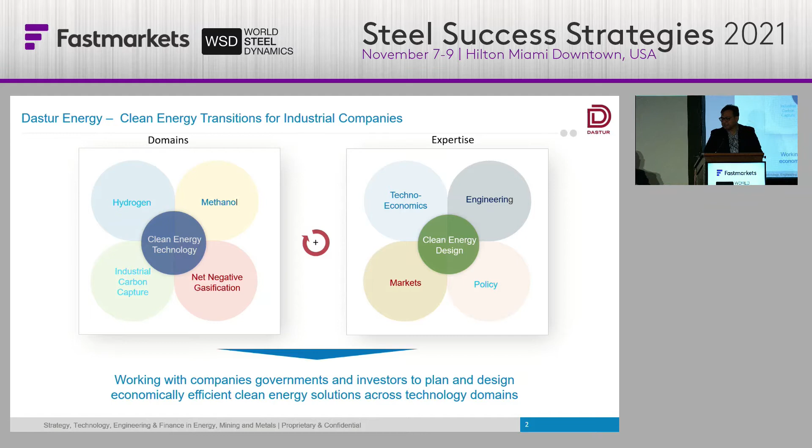So some of the recent projects that are in the public domain that we can discuss a little bit about to give a flavor of the kind of work we do. We're currently engaged in a very interesting and very impactful, we hope, project to capture a couple of million tons of carbon dioxide at Burns Harbor, one of the very storied plants, in Burns Harbor, Indiana, which is a 5 million ton steel plant. Many of you are familiar with it. It is the first carbon capture project, by the way, in the U.S. at a blast furnace at this scale.

We just finished up, or are very close to finishing up, the first carbon capture project at a refinery in India, which is a U.S. Trade Development Agency project. Just finished up another project a couple of months ago on petcoke gasification in India, also for a large refiner.

And we also did a large-scale carbon capture and clean energy from petcoke project for Abu Dhabi National Oil Company, which is the 7th largest oil producer in the world, capturing about 5 million tons of carbon dioxide for use in enhanced oil recovery. And we finished that up a couple years ago, just as COVID was getting started. And so these are all feasibility studies or pre-FEED design works that we've done.

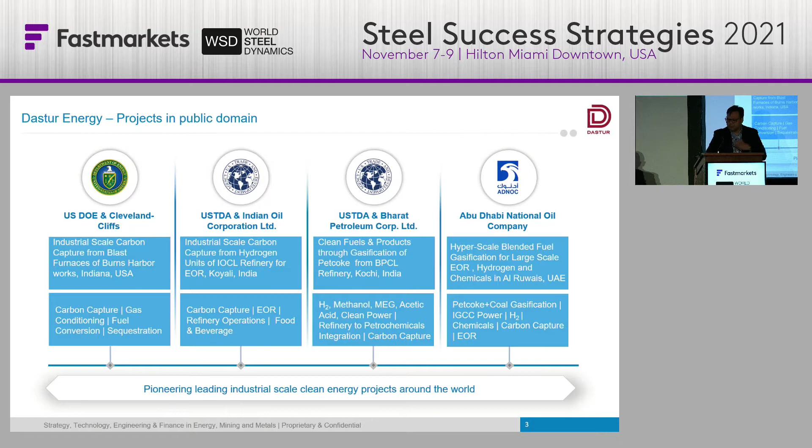And so we get involved in the initial conceptualization, the design, the FEED, and we are really not tied that way to any technology provider per se. We work with multiple technology providers to do these studies on behalf of clients.

So specifically, I won't go over this too much, but as you know, steelmaking generates a very substantial part of the industrial emissions. Industrial emissions make up a quarter of the total emissions in the world. And steel makes up about a quarter of that. 7% is the average number across various studies that we've done.

And specifically when we talk about Europe, the cap and trade, the ETS scheme that is in place and that has been increased recently, results in approximately, we think across the steel makers we work with, about a 30% reduction by 2030 in terms of their carbon footprint for integrated steel makers. So that is a large motivator, basically an accelerator, to make decisions and choose the right path in terms of moving forward.

A part of this battle really is that there are several things complicating the situation here. One is the change in regulatory landscape, both in the US as well as in Europe, and the emerging landscape in places like India and China.

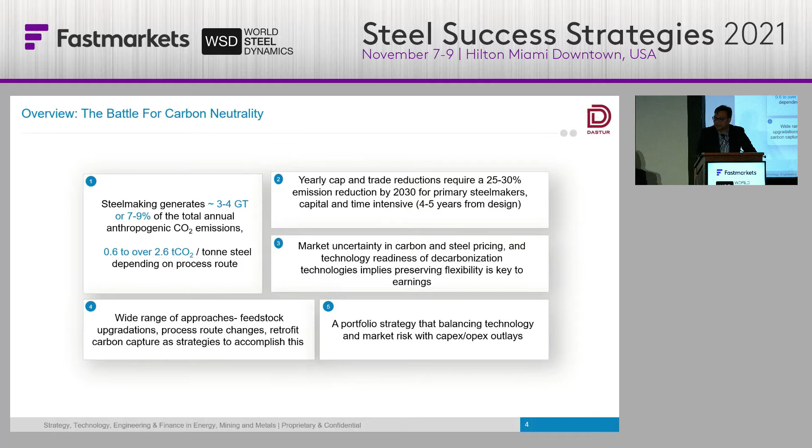In Europe, the ETS cap and trade numbers have also been changing, and there's been an increased push to increase the level of carbon capture, and I think the targets for 2030 have been going up quite a bit recently. So that's driving a lot of the activity.

We talked about the 3 process routes. I won't go into detail, and these are kind of the overall numbers for capture. When you add up the different contributors, obviously the lowest is the EAF route. Then there's a natural gas DR route, which results in 1.2 to 1.4 tons of carbon dioxide per ton of steel produced. And then the BF-BOF route, and that really includes all the emitters possible, which includes sinter plants, coke oven batteries, and the blast furnace, which of course is the largest emitter in the integrated plant picture.

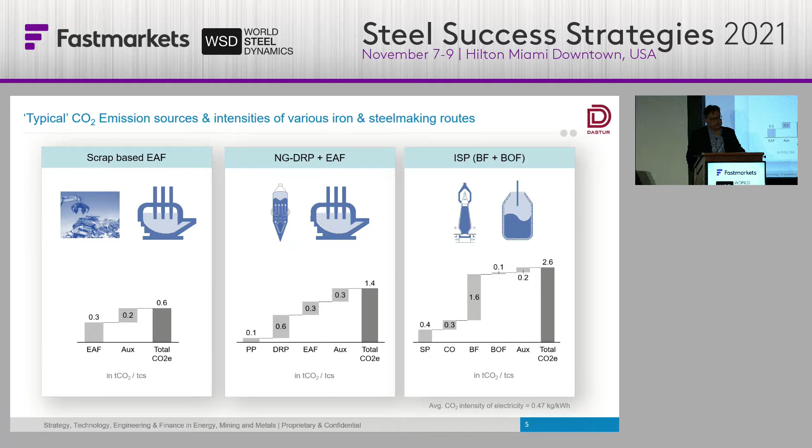Now the numbers in the U.S. are a lot better, and the numbers at plants that we've been talking about, like SSAB or IJmuiden, who we'll talk about in Europe, are much better. Some of these are some of the best plants in the world, and many of those plants have significantly lower carbon footprints than the numbers you see here. These are global averages. The World Steel Association average across all the plants is about 1.8 or 1.9 tons of carbon dioxide per ton of steel. So that's across all the different kinds. So this is the range of numbers.

So when we look at the different paths taken by the different players, I'll talk about some of the recent developments. ArcelorMittal, as you know, recently moved away from a blast furnace carbon capture project, and they've moved to switching to an EAF, and they have also been going for a while at their Ghent project, a carbon to ethanol project, which is very interesting. They were actually going to do about 3 million tons of carbon capture and store it under the North Sea, and they've moved away from that and into this.

We're involved in the project at Cliffs that I mentioned, a DOE study with Cliffs to design a carbon capture project for the Burns Harbor blast furnace. The one project on the DR/EAF route that is actually implementing carbon capture already is the Emirates Steel project, which captures about 0.8 million tons of carbon dioxide per year and has been in operation since 2016. We're also involved in a DR project in India at Jindal Steel and Power, which has gasification and is doing carbon capture. And then you heard directly from SSAB.

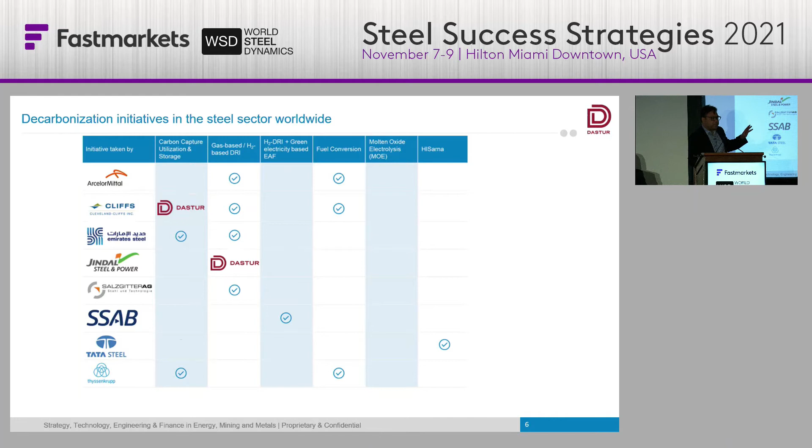There's Tata Steel IJmuiden, which recently committed to a hydrogen route for carbon capture on their blast furnaces at IJmuiden. So there's a range of different approaches taken by the different players. I'll talk a little bit about the Burns Harbor project because that's something we're very close to, and we see a lot of opportunity for it to be replicated at other blast furnaces.

Burns Harbor is a 5 million ton primary steelmaking operation. It's a very large-scale operation. We plan to reduce the carbon emissions from the blast furnace by about 70%, capturing about 2.8 million tons. And we plan to do it in a process that keeps the cost neutral to the 45Q tax credit regime in the U.S., which gives you about $50 of credit.

The project uses proven carbon capture and gas processing technologies for both carbon dioxide capture and hydrogen separation. The hydrogen will currently be used for clean power. It'll just go into the powerhouse for now, replacing natural gas. But over time, as the demand for hydrogen and the types of uses of hydrogen in the steel plant increase, we expect it could be used for other things, such as maybe someday hydrogen-based blast furnaces, direct injection into the blast furnace, for example.

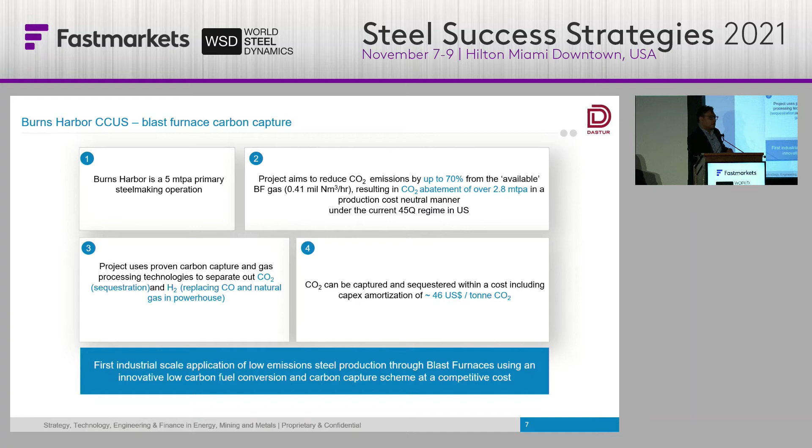Our current cost of the project, based on the technology and the numbers that we have, is about $46 per ton. That includes CapEx amortization, and that also includes about a $10 cost approximation for transport and storage offsite for that carbon dioxide.

So in the different directions that folks have taken, and we are also engaged with several steelmakers in conversations, there are several challenges that were talked about earlier today. Specifically, if we're moving to gas-based DRI or hydrogen, we're talking of large projects with at least 1 million tons of production, and in the DRI route there's about 1 million tons of carbon dioxide coming out for 1 million tons of production.

So there's a need to implement CCUS or find a transition to hydrogen, and as the panel just before me talked about, finding 1 million tons of hydrogen at an acceptable cost point is extremely difficult, even in the next 2-3 years. It's really difficult.

And secondly, for gas-based DRI, right now the cost of gas is very high everywhere. But even if you assume a longer-term natural gas price of about $3 per MMBTU in the US, the corresponding price in Europe would be about $7-8, even with the pipe gas coming in from Russia and Ukraine. So the cost of the gas DRI has to be taken into account in figuring out the economics for that route versus carbon capture on an existing primary steelmaking route.

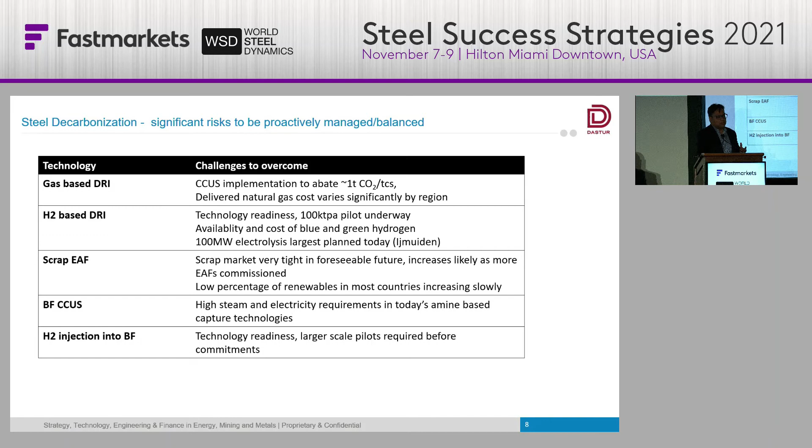And again, hydrogen injection into the BF: there's a lot of interest from steelmakers we deal with on that, but that technology also is not ready to be bet on by somebody who is producing any substantial volume.

So here is the range of cost. This is a U.S. Department of Energy study from 2020 that showed the costs of hydrogen production from different routes. And if you look at anything that's green, if you start from nuclear electrolysis, it goes, in dollars per kg, anywhere from 5, 6, 8. So even if you take about $4 as the lower bound as to where it will be in the near term, it results in a cost of about $200 for the hydrogen alone that's needed.

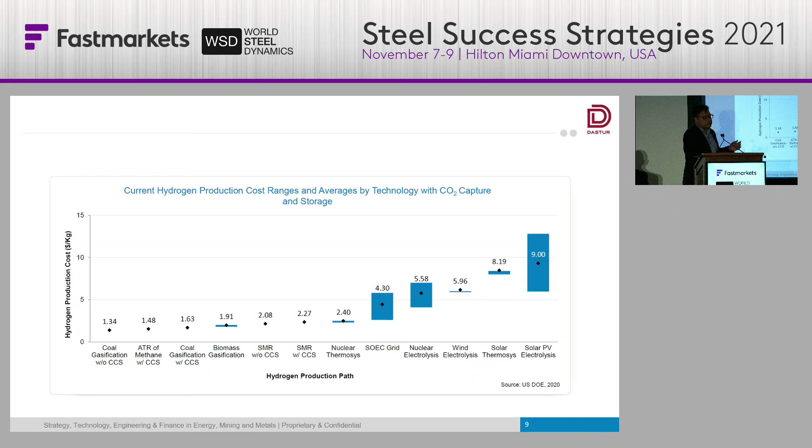And that's not viable obviously from a cost of production standpoint. So today, in the near term, really this is not an option for somebody who is a large-scale steelmaking operation, we feel.

Again, this is the percentage of electricity in Europe that is coming from renewable sources. There are some exceptions like Sweden and Iceland and Ontario in Canada that have very respectable percentages of renewable electricity due to various geographic reasons. But across Europe, this is the EU 27, people are often surprised to know that in 2020, barely 20% of the electricity is renewable, and this is an EU projection. It's supposed to go to only 30% by 2030.

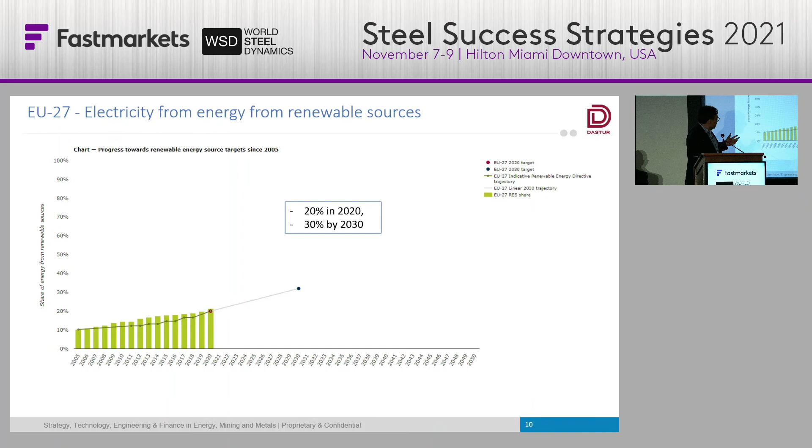So you can't rely on your scope 2 emissions really being green, because the grid is not going to provide you that, basically.

So one of the advantages of carbon capture is that there are a relatively large number of sites. Of course, now this number has to increase many times in 5 years. But there are, as of now, 27 facilities across the world, according to the Global CCS Institute that tracks all the live projects, capturing 36 million tons of carbon dioxide as of September 2021.

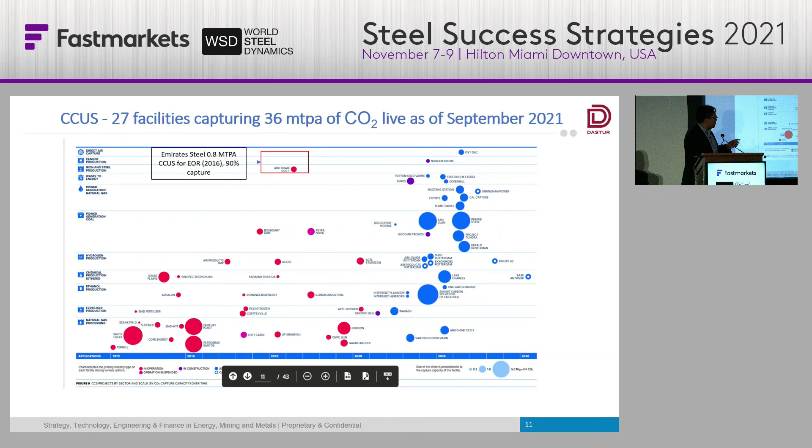And they're spread across different industries, from natural gas processing to ethanol to power generation. But the core technologies are the same, and they've actually been deployed. So the cost, the economics, the challenges are fairly well understood for carbon capture technologies.

So in summary, the message is decarbonization is the goal, and people shouldn't get focused on green versus blue. The only thing to really measure is the carbon capture. Is carbon capture actually happening, and can you operationally do it with the economics that you have? No point in coming up with something that is too green but is very unlikely to get implemented in, let's say, the next 3 to 5 years, and is not a viable solution.

Successful pre-2030 projects in the industry, given the new cap and trade regimes, require approximately a 30% decarbonization, and the risk-mitigated way to do that is the main challenge we feel in front of steelmakers today. Gas separation technologies, carbon capture, are proven across multiple industries. It's still early days for the steel industry for capture at a blast furnace or a coke oven battery, but the technologies have been used extensively.

Carbon dioxide does not have borders, so as Lorenzo and others mentioned, policy coordination and ensuring that the right trade protections are in place are a must to ensure that the investments in Europe and the U.S. are actually funded and are not, quote unquote, carbon dumped from outside.